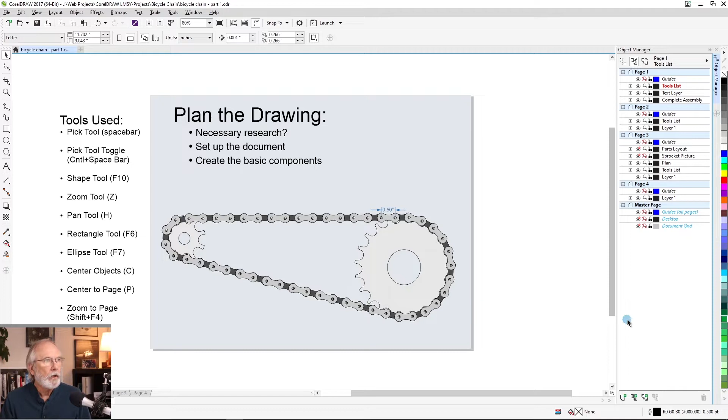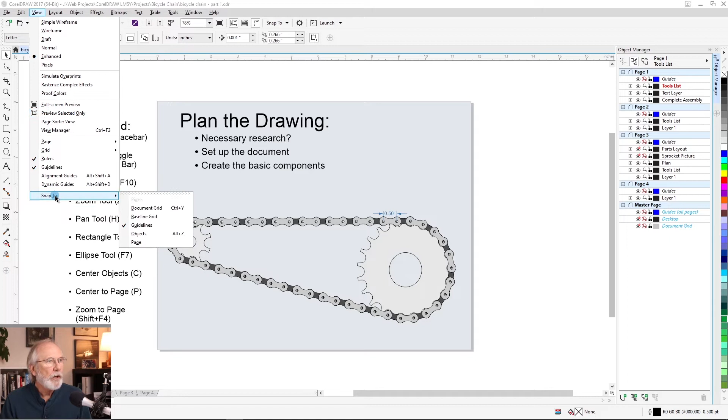Now we want to plan the drawing, and that means to think ahead what we're going to create, any components, and then we also want to set up our document. First thing, let's set up our rulers. Go to View, Rulers, and this will put rulers in the top and the left-hand sides of your drawing. Next, go to View, Snap To, Guidelines, and again, View, Snap To, and Objects. And you'll see why later on that this helps.

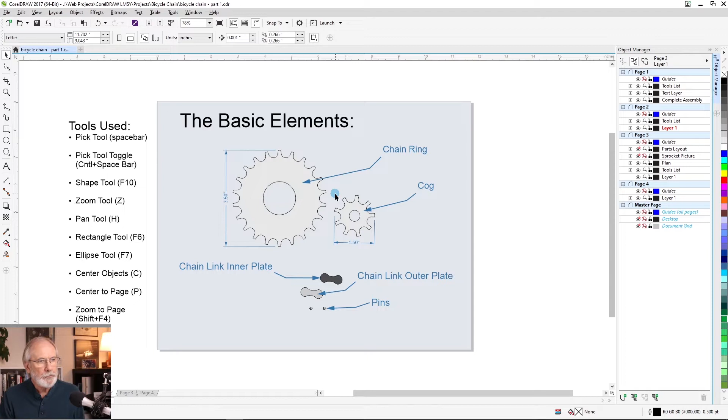All right, well, it's time to create our individual elements. These are going to consist of a large sprocket, or what's called in bicycle parlance the chain ring, and then a smaller cog. And we're also going to create the inner and outer plates for the chain links, as well as the pins that hold those links together. All right, let's get started. On the right, you'll notice that I've listed some things that I want to do. I've already experimented with the drawing, and I've decided that these are the dimensions that I want. Your planning may lead to other decisions.

We're going to create the chain ring at 3.5 inches diameter, and we're going to have 22 teeth on it. And we're going to create a 1.5 inch cog and put 9 teeth on that. Now, the link pins are going to be 0.096 inches in diameter, and I'm going to place those at 1/2 inch on center. This will allow me to size the inner and outer plates appropriately with that dimension in mind.

I will try to point out what I'm doing at each step. Whether I'm using the shape tool, I'll tell you to press F10, or if I'm centering objects to press C. I'll try to call them out when I use them, and I hope I don't miss. All right, so let's press F7 for the ellipse tool. Hold down Control-Shift and make your circle. I'm going to go up to the property bar and to the object size. Notice I can set both the height and the width here, and with the lock ratio on, if I set one, then the other will be set also. So I'm going to make it 3.5 inches.

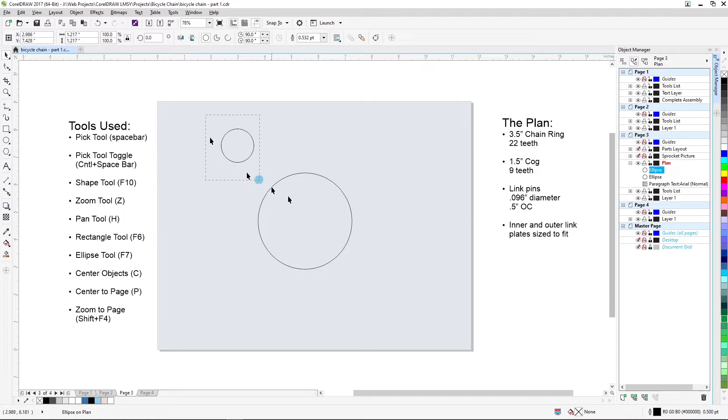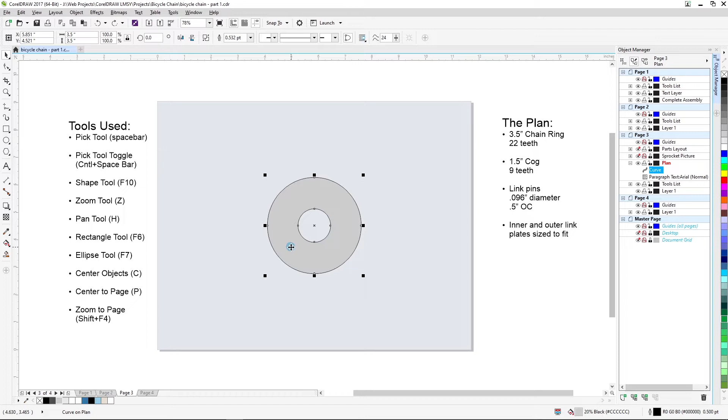All right, I'm going to make another circle, and this is going to be our hub. So it looks about right. Press spacebar, select both of these, and press the P key to center those. Now, I'm going to use back minus front to delete that circle. And that's selected. I'm going to give it 20% black. And you see that the center is gone. I'm going to create the cog by copying this shape. So press Control D, and go up to the object size, enter 1.5, and that cog is ready to go. We'll cut the teeth out in a little bit.

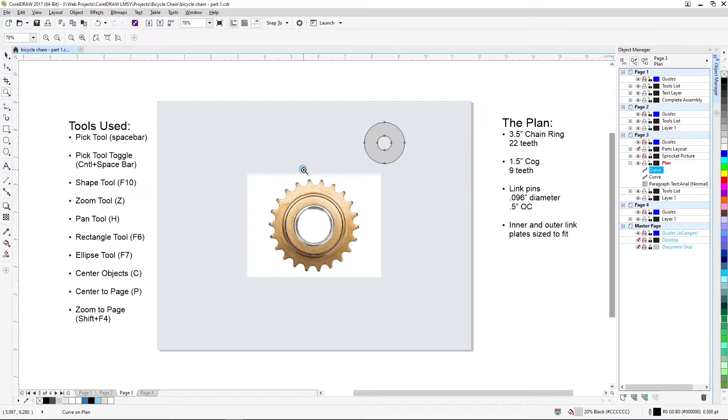All right, so now we want to cut our teeth out. And let me show you a picture of what we're going for. This is roughly the shape we want. I'm going to zoom in, press Z, and then you can click and drag. Notice that these teeth are made with a sloping shoulder to the outside. They're not like a circle. If we used a circle, then these would be too sharp to the edge of the ring. So this is the shape that we want to go for.

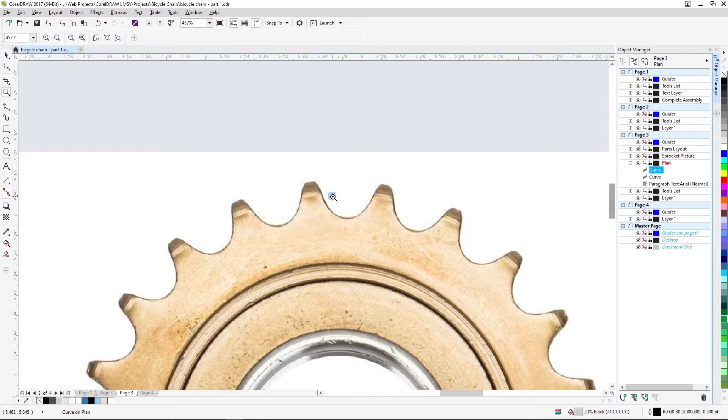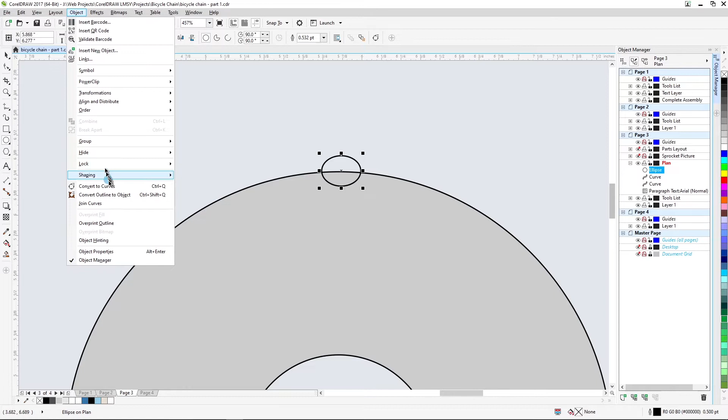Press F7 and let's make a circle. This time I'm going to not constrain the circle. I want a shape about like that to get that rough shape that we had. All right, convert that to curves. Object, Convert to Curves. Press F10 for the shape tool. All right, now I want this node to be symmetrical, and it is. I'm going to pull it down about like that. Now press spacebar. I forgot to set my nudge distance. Yep.

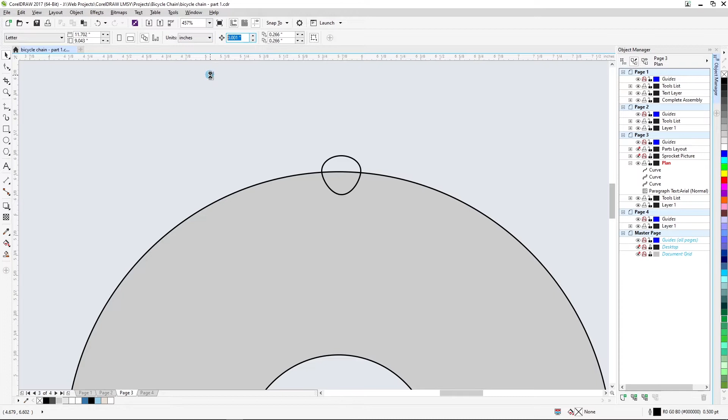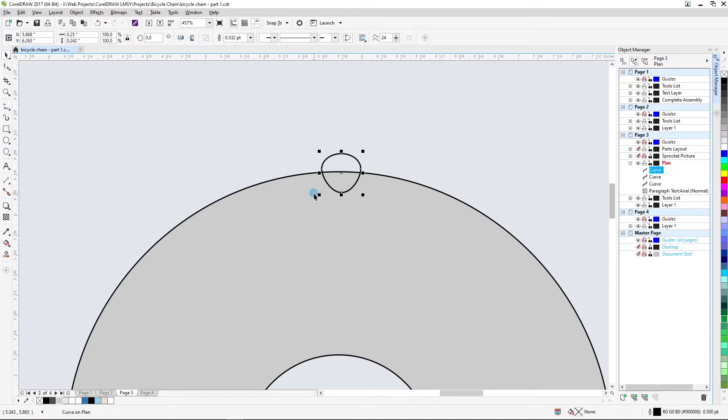My nudge distance is set at 0.001, which will allow me to use my arrow key and move this up and down just slightly. Now I'm not sure that's large enough, so I'm going to experiment first. Let's hit Z, right click, and when I look at that, I'm pretty sure that's not. Oops. So press Z. Yeah, I want that to be larger. All right, hold the Shift key.

Okay. Now I'm going to use another tool to make these teeth, and I need to rotate this shape around the edge and then cut out the center sprocket. So go to Window, Dockers, Transformations, Rotate. And notice that the Transformations Docker is nested with the Object Manager. Okay. Now to make this rotate around the circle, we're going to use the Transformation Docker.

Let's see, I'm going to set the relative center so we can rotate around the circle. So go to the object, that's our center. I'm going to pull that down to the other. Now notice how it says center there on the right. That tells me that I have placed this at the center of the object that I'm over. That's why a while ago we set the snap to objects.

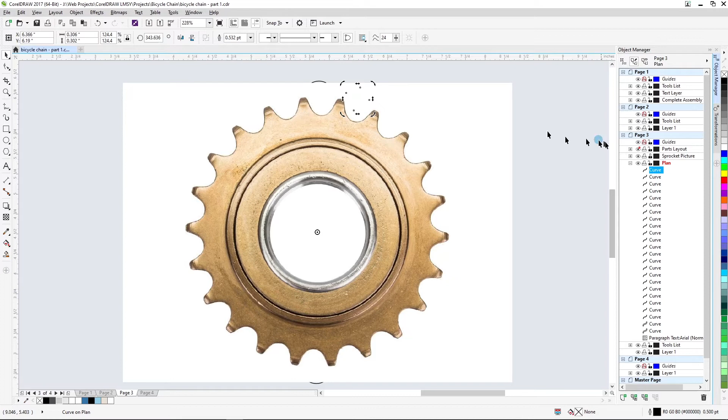I'm going to use CorelDRAW's math function to determine the angle that these need to be rotated on. So I'm going to enter 360 degrees in a circle and divide that by 22 teeth, and then I'm going to apply. Now, remember the shape that we had? Go to Object Manager. Where we have this kind of narrow shoulder here in between the teeth. We don't have that here. That means that our shape that we're using to cut is too small. So let me hit Control Z. One more time. Okay.

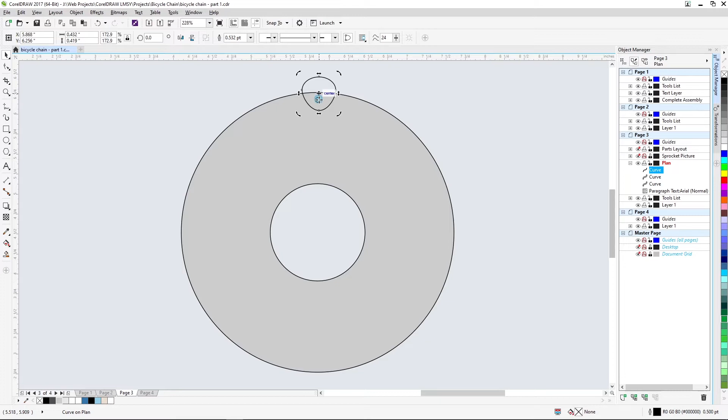Now I'm going to make this object bigger. I've done this before, and I know that when I make it bigger, my center of rotation is going to change. So I'm going to move it back up here so that I don't have to go hunt for it. Press the Shift key and click and drag. Now I'm going to use my down arrow key, move this down a little bit. I'm going to set my center of rotation here in the center again.

I'm going to go back to the Transformation Docker. I still got the right angle set, still got 21, and relative center is set, so I should get the shapes I need. There we go. That's exactly what I wanted. It should work just right. Now I'm going to use this same shape to cut out of the other sprocket. So let me duplicate it. Press Control D. Move that off to the side.

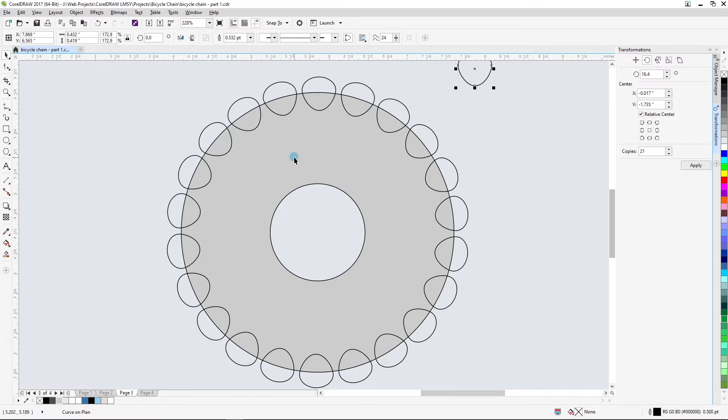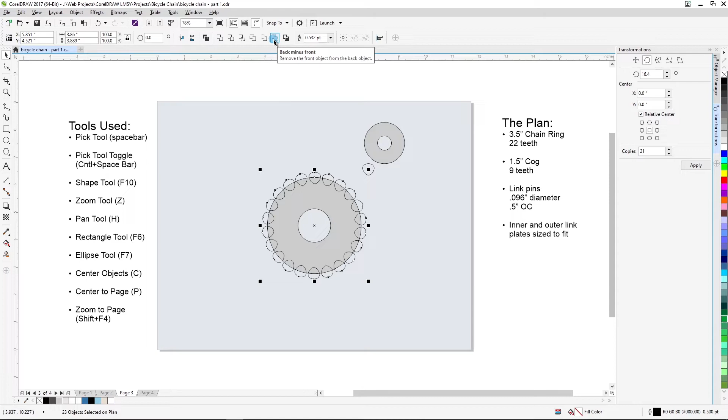I want to zoom out a little bit. So press Z, right click, and there we go. Press the space bar, and then mouse over all the shapes. Go up to Back Minus Front, and that will cut the front shapes out of the back one. And there we go. Our first sprocket is complete. Move that one out of the way. I want this guy in the middle, so highlight, press P. Bring my shape back down.

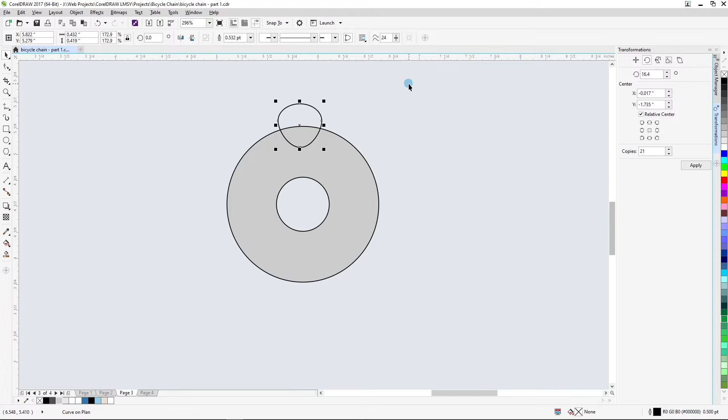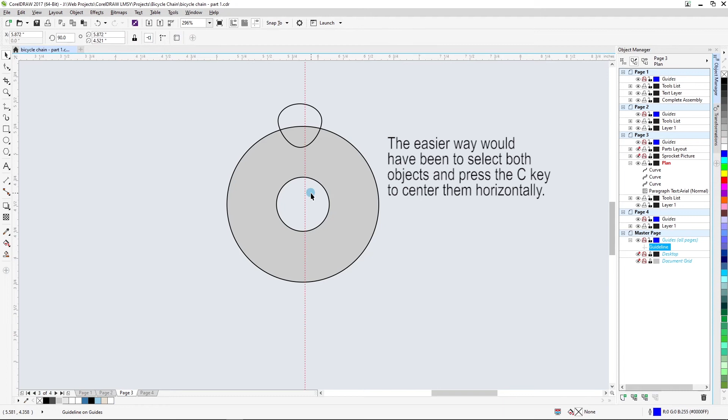And I'm going to zoom in again, press Z. There we go. I had to press Control space bar for that one. So let me pull it down to just about the right position. I want to make sure that's lined up. It doesn't look like it's lined up on the center. So let me pull a guide out to the center. When I let go of the mouse, the guide is highlighted in red, which means it's selected. If I hit P, that'll take it to the center.

Now I can select the shape and move it, snap it to the center. Oh, we're pretty close. Right arrow. Okay, and down. Now I'm going to go back to my Transformation Docker, and this time I'm going to make a total of 9 teeth, so I need 8 copies. And let CorelDRAW do my calculation again. 360 degrees divided by 9, and hit apply. Oops, I almost forgot.

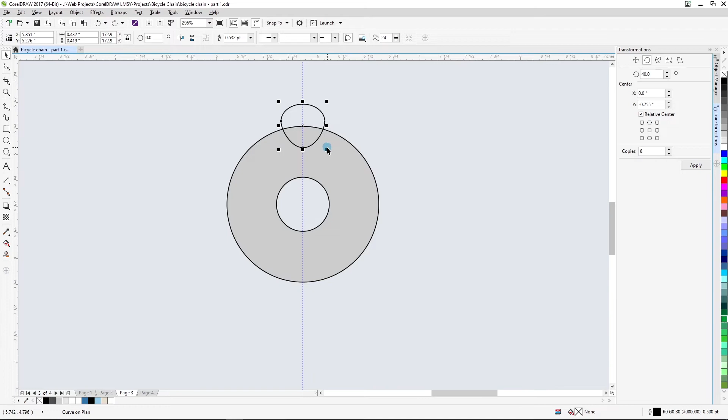So I need to set that to center again. Yep, set to center. Now I'm ready. My relative center is set where I want it. And hit apply. That's pretty close, but not quite where I want it. So I'm going to hit Control Z. I'm going to hold the Shift key and make this just a little larger, and move it down with my arrow key just a little bit. Double click and move my center of rotation back to the center.

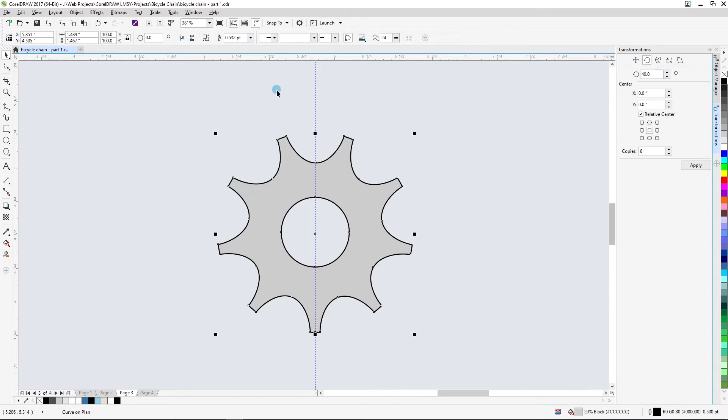Let's apply again - that's exactly what I was looking for. This shoulder is narrow enough and these are wide enough, so I'm good. All right, highlight all the shapes. The ones in the front are going to cut their shapes out of the one in the back using back minus front. Shift F4. I have my two sprockets done.

Next, I'm going to create my link pins. Remember, these are going to be 0.096 in diameter - we'll set that in a second - and 1/2 inch apart. I'm thinking ahead on this. I'm going to use the nudge distance, so I want it set to 0.5, and right now it's set to 0.01. So let me change that now: 0.5, enter.

Now I should press F7, but that's good enough. Hold Control Shift and click and drag. I made the shape, and remember it's going to be 0.096, and let's make it 0.096, enter. I want that in the center of the page.

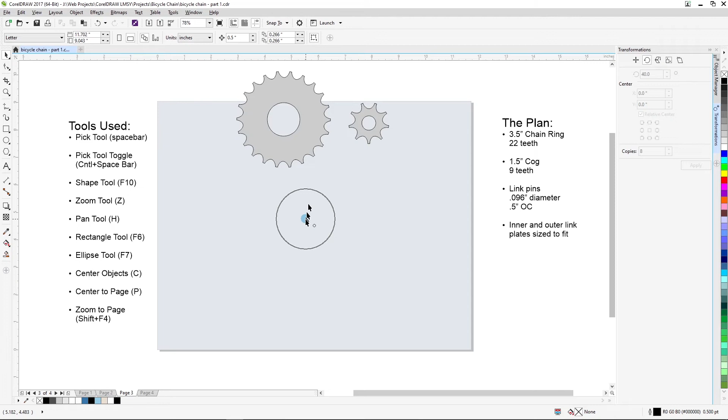Press spacebar. I'm going to delete this, so highlight the guide and press the delete key. Press Z and zoom, and now press the space bar. I want to use the interactive fill tool to give that a little bit of dimension.

Press the space bar. I'm going to hit Z and zoom out, zoom back in. All right, press space bar.

Remember, I set my nudge distance to 0.5 inches. With that ellipse selected, if I hit Control C and Control V, I've pasted a copy right over the top. And when I hit the right arrow key, this will go 1/2 inch away, and that is what I need. I'm going to click and drag, and now I'm going to press Control G to group these. If you do it through the menu, press Object, Group, and Group Objects - that's Control G. Now it's time to create the inner and outer link plates.

Now the size of this is kind of arbitrary, so it doesn't really matter - I don't have to measure it, but I do want it to be more or less in proportion. Press F6 for the rectangle tool and draw a rectangle around the outside of this. I think I'm going to want it about that big. All right, press the space bar, click and drag over both, and I can center these where they are by pressing the C key and then the E key. The C key centers them horizontally and the E key centers them vertically.

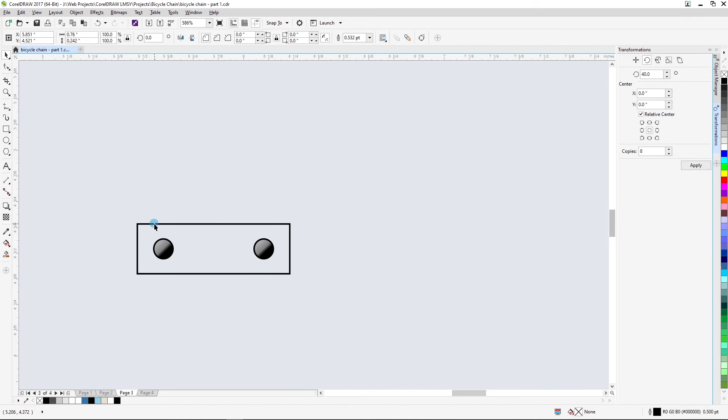Click off, click back on, and I want to use the shape tool to round the ends. So press F10, click the corner, and drag in, and that shapes the outside edges. I want to press Control Q to convert this to curves - I didn't put that on my list, so let me show you. Control Q - all right, that's now a curve. Press F10 for the shape tool.

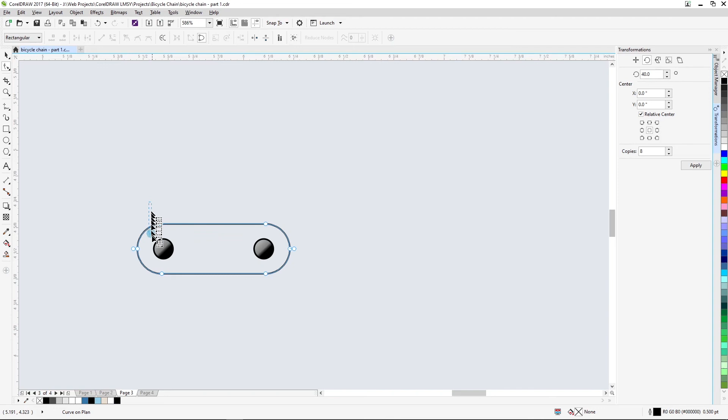Now I want to make sure that these two nodes are curves, so convert to curve, and convert to curve. Notice that that's a smooth node - I want both of these to be smooth nodes also.

Now I'm going to create a new node here in the center. Click on it once and then press the plus key on my keyboard. Highlight it, and this one I want to be a symmetrical node. Go down and do the same thing on the bottom - this is inexact, so don't worry about it. Once again, press the plus key, and that turns that into a node, and I want a symmetrical node.

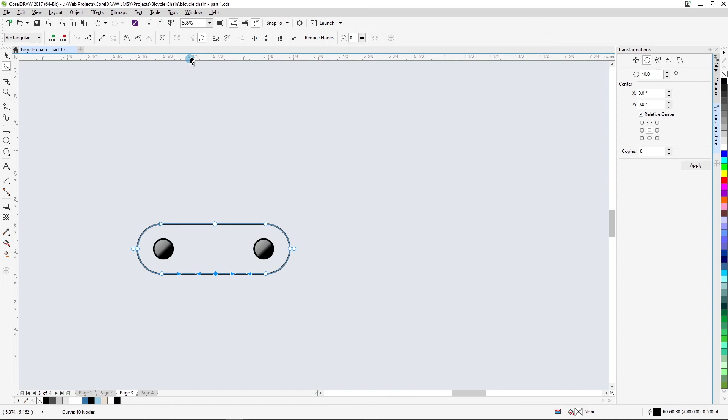Now I'm going to draw down some guides because I want this to be a little more precise. Click over here, and I've got my node. Drag that up, drag that one down, and now with my guides here, my control handles will snap to the guides. Notice that as I pull these, the arrows are going out in both directions, and that's what a symmetrical node will get you.

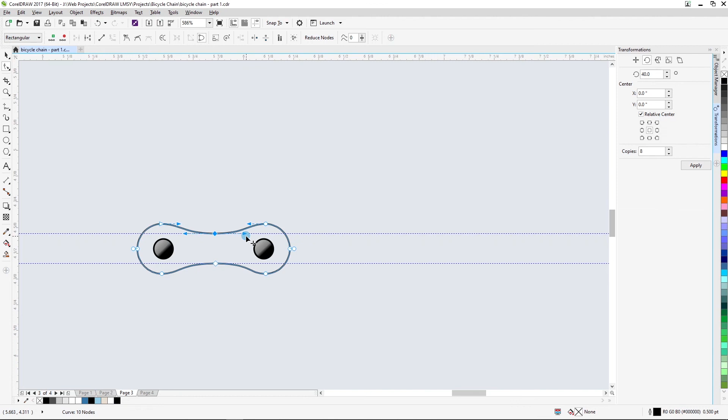Press that one. Drag it out a little bit more. I think I have that first one done.

All right, press spacebar, control space, and I want to set that one at - let's make it 10% black. I'll get those back in a second. I'm going to duplicate that, Control D, and I want to make that one 70% black. Now select both of those, and I'm going to press Shift and Page Down to put those behind the pins.